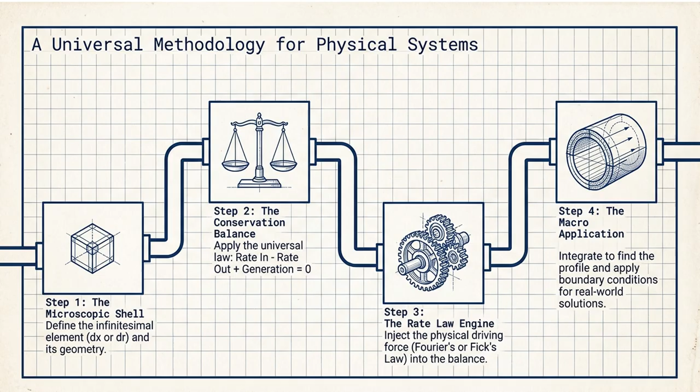The final step would be to integrate that and get an expression for T or Ca, and use boundary conditions to eliminate the constants of integration that are present in the equation due to double integration. So boundary conditions would either be given in the question itself, or we'll have to use logical assumptions to eliminate the integration constants from our system.

So this is an example of energy conservation in rectangular coordinate system, and as you can see, we have used Cartesian coordinate system. The assumptions we have used are: steady state system, hence accumulation is 0, and 1D conduction. That's why it's in Cartesian coordinates. The heat is only traveling or changing in the x direction. No heat generation; we are not assuming any generation of heat in this slab, and we have assumed the thermal conductivity of this material to be constant.

Now, using the energy balance equation, rate in minus rate out is equal to 0. That would be rate in is equal to rate out, as we assume steady state, there will be no accumulation term as well as no heat generation term. So at the input there is qx, that is the heat input, the rate in, and at the output there is qx plus dx. Now qx plus dx is qx plus the rate of heat transferred from this slab to the surrounding. So that is the expression for that, and on simplification this will get cancelled out.

So dqx by dx equals 0 would be the final expression we get. Since this is equal to 0, we can say that the flux qx is constant, as differentiation of a constant term is 0. Thus flux is constant across the slab. That's what's written over here. Now we'll substitute qx equals minus k dT by dx. That is Fourier's law of heat conduction, and we'll get a temperature profile on integrating that particular expression.

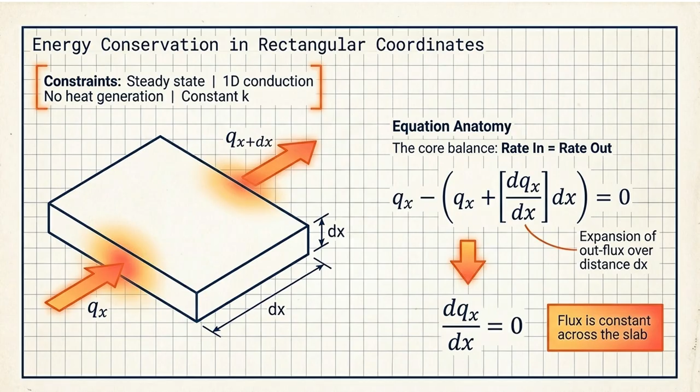So as you can see, this is our Fourier's law, qx equals minus k dT by dx. Substituting this in our previous equation, dqx by dx: we have assumed thermal conductivity of the slab to be constant, so it will come out, and there will be double differentiation of the temperature with respect to x. d squared T by dx squared, that is a typo here, is equal to 0.

On integrating it two times, we'll get an equation for temperature. So double integration yields T equals C1x plus C2. Now C1 and C2 are constants of integration, and to eliminate these constants we'll have to use boundary conditions. Boundary conditions are the conditions that are on the boundary of the system. So like at x equals 0, that is a boundary.

So it's given that at x equals 0, the temperature is T naught, and the other boundary is the right hand side. So at x equals L, the temperature is TL. Using those boundary conditions, at x equals 0, T equals T naught, this term will get cancelled and C2 will be equal to T naught. That's what's written over here. Now substitute C2 equals T naught in this equation.

Now at x equals L, we know T equals TL. So TL equals C1 into L plus T naught. C1 will be equal to TL minus T naught by L. That's written here. Substituting C2 and C1 back in this equation, we'll get our final output. T equals T naught minus (T naught minus TL) into x by L. That is our temperature profile that we can write across the slab's length.

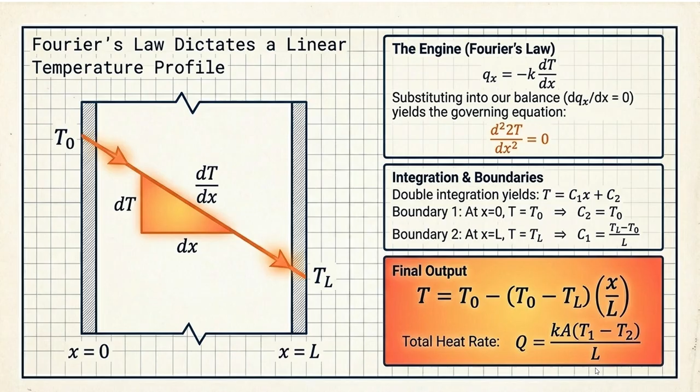Now, a very popular analogy that is used for heat transfer systems, especially walls, is thermal resistance, the Ohm's law analogy. As we know, rate is driving force by resistance. This term is similar to the term we've used in Ohm's law. V equals IR, or I equals V by R. The rate here is the current, V is the driving force, and R is the thermal resistance offered due to the walls.

So let's suppose a solid wall that is squeezed in between fluid A and fluid B. Fluid A has some thermal properties, fluid B has some thermal properties. Heat transfer from solid wall to B and solid wall to A would occur via convection, and the solid wall will have a conductive resistance. So if we use these resistances in terms of the Ohm's law analogy, we'll write L upon KA, that is the total length L of this wall upon K. K is the thermal conductivity of this wall, and A is the cross sectional area of this wall. So using the electric current analogy, resistance is length upon conductivity into area.

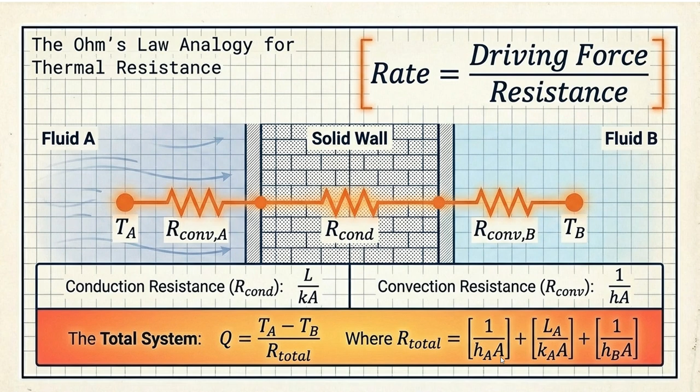So our R total would be the summation of 1 upon hA into A, that is for fluid A, L upon kA into A, that is for the solid wall, and 1 upon hB into A, that is for fluid B. Keep in mind these A are surface areas, not associated with fluid A.

Now let us solve a numerical based on that. This is a numerical on composite wall analysis. So basically we have a brick wall. After that we have an insulation, and after that we have a layer of air. The layer of air is basically the surroundings. So imagine a brick wall and some paint or coating is applied on it, that is acting as an insulation, and then this is the surrounding ambient.

So heat supplied to the wall was 400 watt per meter square. The dimensions and thermal conductivities of all these materials are given. Using the electrical circuit Ohm's law analogy, we can assume this as a resistance, this as a resistance, and this as a resistance. The length of this wall is 0.05 meter, length of insulation is 0.03 meter, and the surrounding would be infinite. That's why the end temperature would be T infinity, infinite as compared to these two lengths.

Now, solving for outer surface TR. If we want to solve for TR, using a convective heat transfer formula, that would be TR minus T infinity is equals to Q naught by H. Driving force is equals to IR, V is equals to IR basically. So TR is equals to T at ambient temperature. Ambient temperature would be 25 degrees centigrade. We have used that here.

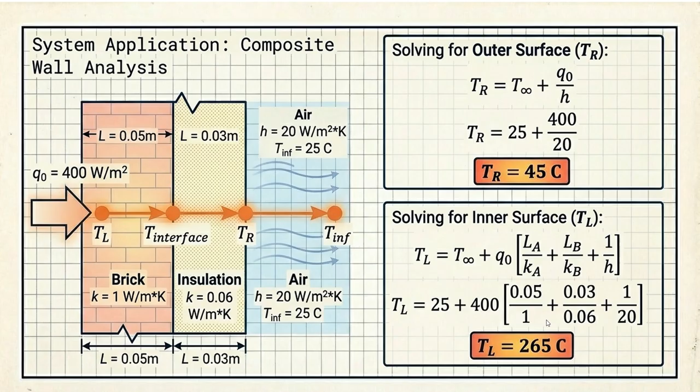Now another shell balance derivation, and this one is for mass diffusion or mass transfer. So this, as you can see, includes a spherical coordinate system. So mass diffusion in spherical systems, constraints or assumptions is of course steady state. Then radial diffusion only, the diffusion that will occur in the direction of r. That is the characteristic property of the spherical coordinate system. Then isothermal system, so no temperature changes, and no bulk flow. We have neglected the bulk flow.

Unlike a flat wall, the area available for transport expands radially because we have assumed radial diffusion. So the area for diffusion will increase radially outwards, and it will increase with r raised to the power 2. So surface area for diffusion would be 4 pi r square, and area increases with r, thus flux must decrease outwards. So if we draw a graph, at increasing r, the flux will always decrease because the area is increased. Since flux is rate per unit area, if the denominator, area, increases, the flux would always decrease. That's what is written over here.

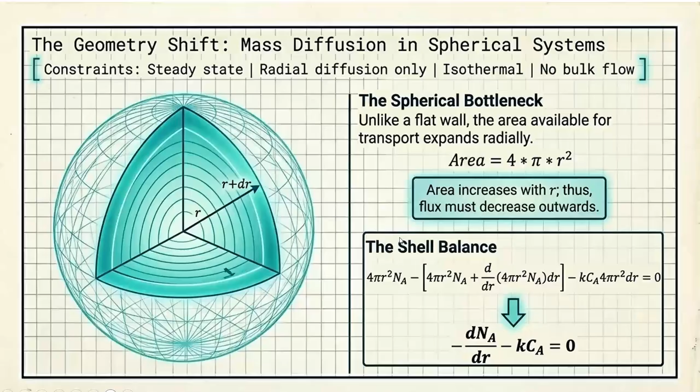Substituting Fick's law here, Na. So we know Fick's law says that Na is equal to minus dAB into dCA by dr. dAB is the diffusivity of A in B or B in A. dCA by dr, that is Fick's law. Now substituting that over here.

So multiplying and dividing by r square. In this term, if you multiply and divide by r square, so 1 by r square, and then send this r square into the differential. So 1 by r square d by dr, r square into dCA by dr, this term, minus k. That dAB that was over here is also divided by the whole equation. So dAB is here and here it would have been 0. So this term

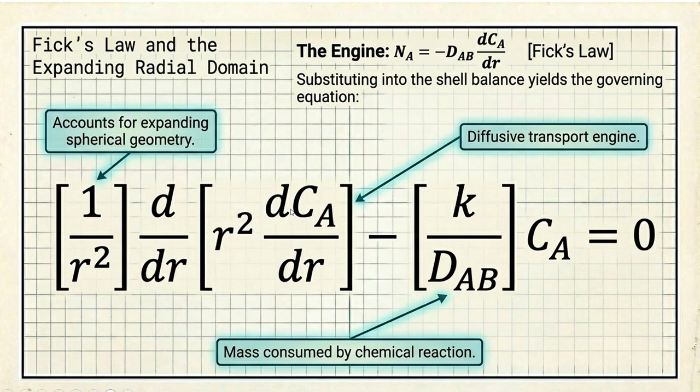So d by dr of r square into dCA by dr is equal to 0. On integration, this yields CA is equal to minus C1 by r plus C2. Again, boundary conditions will take care of these C1 and C2, and we will get the concentration profile CA. The profile is inherently non-linear strictly due to spherical geometry.

In case of with reaction, this term k by dAB is substituted as m square, and this is written like this. And when you integrate it using hyperbolic trigonometric substitutions, integration will yield CA is equal to A, after applying boundary conditions, A into sinh(mr) by r. Again, m here would be m is equal to under root k by dAB, or m square is equal to k by dAB.

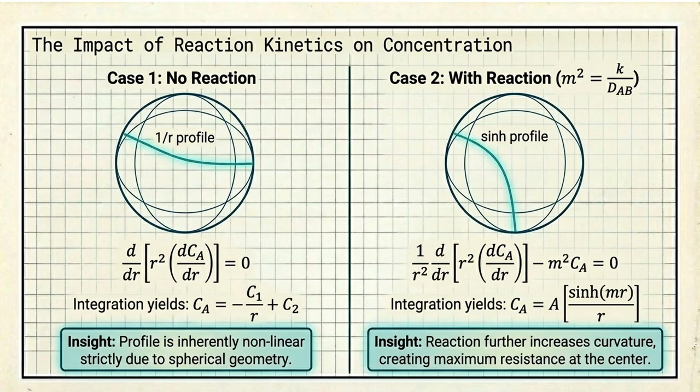The reaction further increases curvature, creating maximum resistance at the center. So at the center of this spherical particle, the resistance for diffusion would be maximum in case of with reaction. System application, again this is a question. So assume a spherical catalyst pellet, and at some distance from the pellet we have to identify the concentration of A.

So this pellet is of radius R. Boundary conditions are given as at bulk, CA is equal to CA infinity at bulk of A. At bulk of A means at the surrounding, at infinite distance from this particle. CA is equal to CA infinity, that is concentration of A. At surface of this particle, r is equal to capital R, flux meets reaction rate. So Fick's law would be used, and Na would be Ks into CA, that is rate generated by a chemical reaction.

And we have to derive this formula: CA by CA infinity is equal to 1 minus lambda square by 1 plus lambda square into R by r, where lambda square is Ks into R by D. And another thing which we have to derive or show or prove is rate is equal to area into Na, and this would translate to this. So let us see how we can do that.

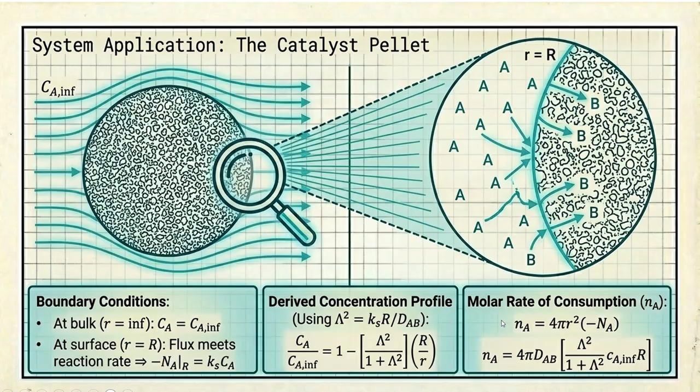This is a comparison between Cartesian heat conduction and spherical mass diffusion. Conserved entity in Cartesian heat conduction is energy, heat, of course. In spherical mass diffusion, it is mass, of course. Geometry: Cartesian coordinate system uses constant area, dx. It is comparable to a flat one. And in case of spherical mass diffusion, it is comparable to a sphere because of expanding area.

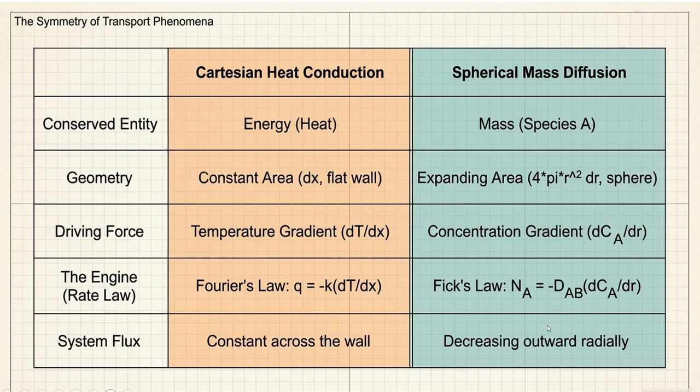Driving force in case of heat conduction: temperature gradient dT by dx is the driving force, whereas in case of mass diffusion, concentration gradient is the driving force, dCA by dr. Rate law: in case of heat conduction, as I said, Fourier's law of conduction is used, and in case of mass transfer, Fick's law of diffusion is used. System flux is constant across the wall in case of Cartesian coordinate systems, and in case of spherical coordinate systems, it decreases outwards radially.